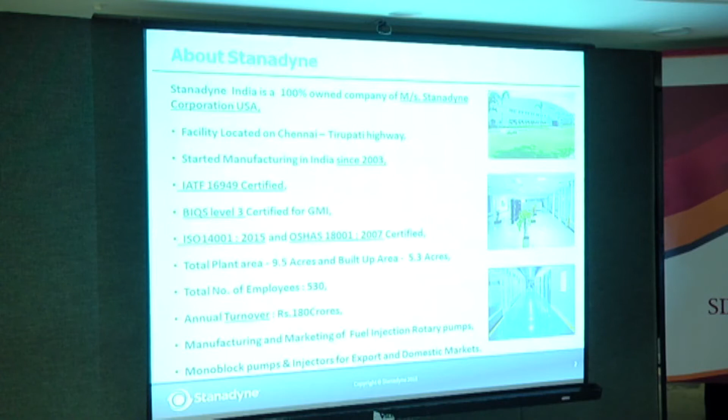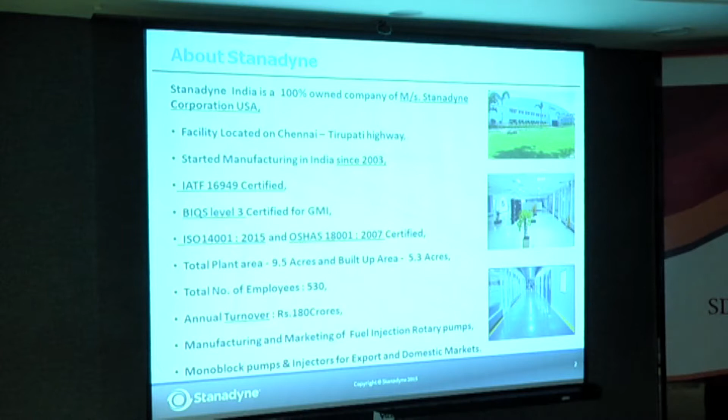Stanadyne has its headquarters in the US. We have 5 plants all over the world: one each in US, India, China, Italy, and Sharjah. Here in India, since 2003 we are certified IATF 16949, ISO 14001, and OHSAS 18001, and also BIQS level 3, certified by General Motors India. Our turnover in India is around 180 crores, and globally we are around 2,500 crores.

We have won certain awards. In 2019, we won Excellence in Quality Development, given by Manufacturing Today, organized by Aditya Birla Group. We also won the CII Excellence in Energy Management Award, which we have been winning since 2015. And this year we also won the Best Supplier Award from General Motors US.

Our products, we are making fuel pumps, which we supply for gensets as well as tractors. We have around 12 customers, and the major ones are John Deere, Kirloskar, and Fiat.

Mr. Balaji will take us through the define and measure phase of the DMAIC approach. In the define phase, our complaint is fuel leakage from the hydraulic head, which is contributing 35.3% of our total rejection in SIPL. Our target is zero rejection from the fuel leakage.

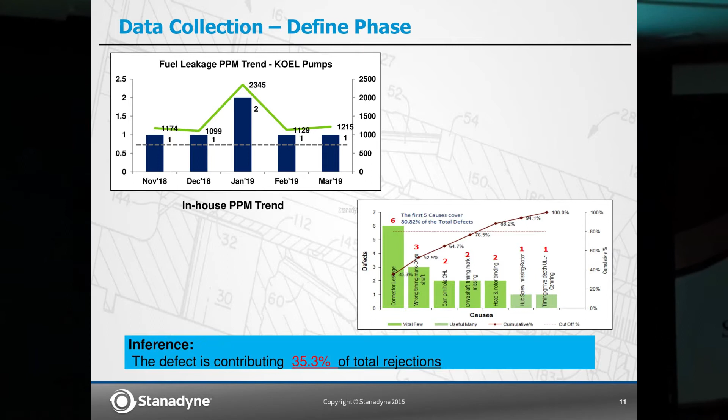This is our cost of poor quality. It will incur around 71,600 rupees overall for the year.

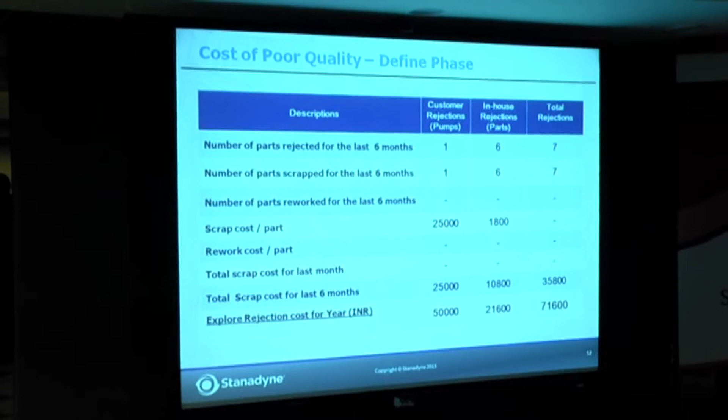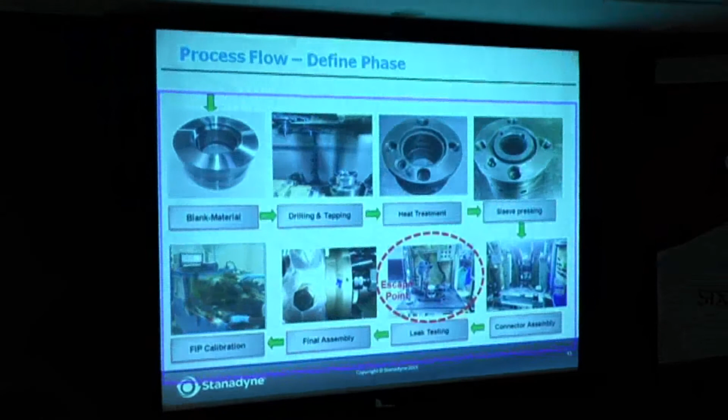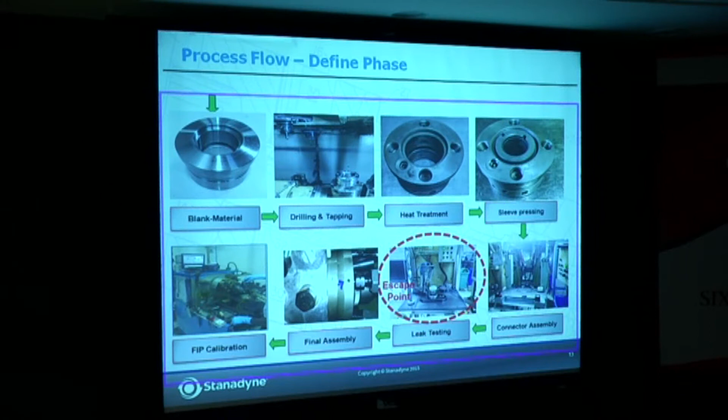This is our process flow. We receive the blank material from the supplier, then do drilling and tapping, heat treatment, sleeve pressing, connector assembly, and leak testing. This is the escape point. Then final assembly, and then we do the calibration. This is our leak test process.

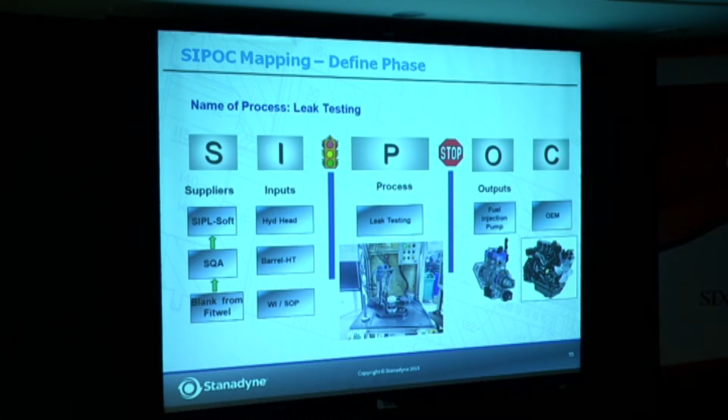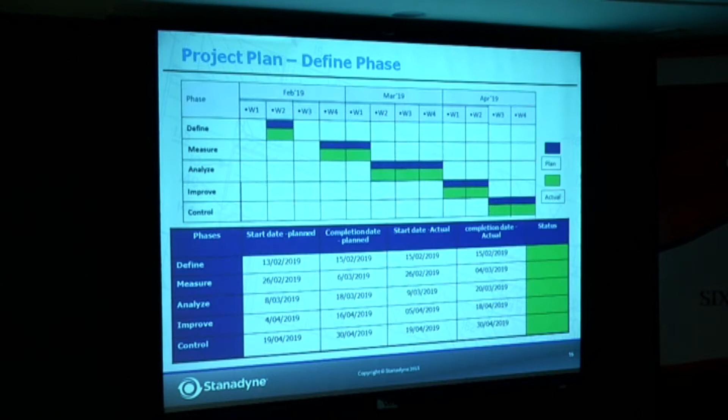This is our SIPOC. Our process is leak testing. Our input is hydraulic head and work instructions. Our supplier is our soft line, our supplier quality, and blank from the supplier. Our output is fuel injection pump, and our customer is OEM. Our project started in February 2019, second week, and completed on April 30th. This is our team members.

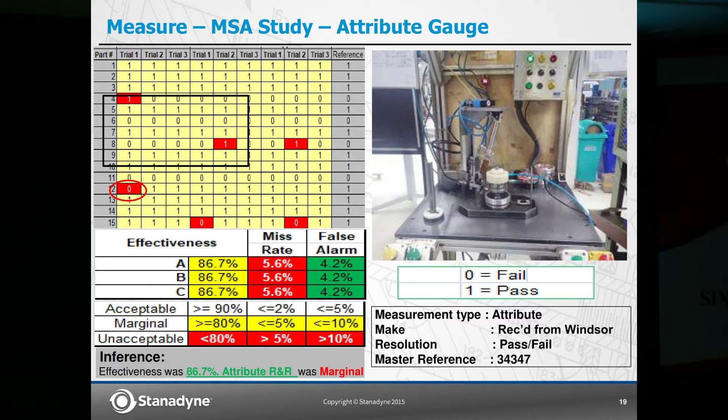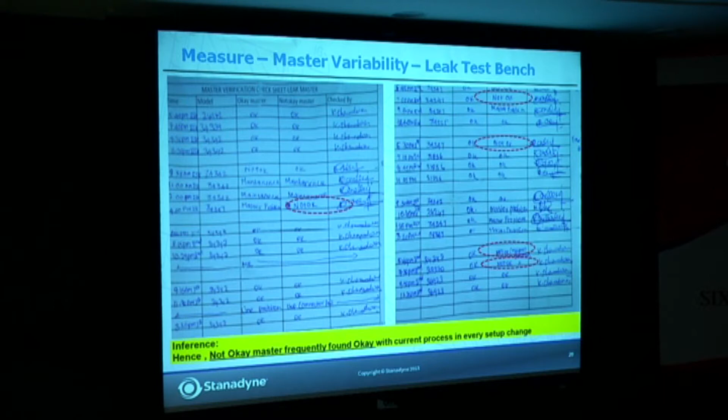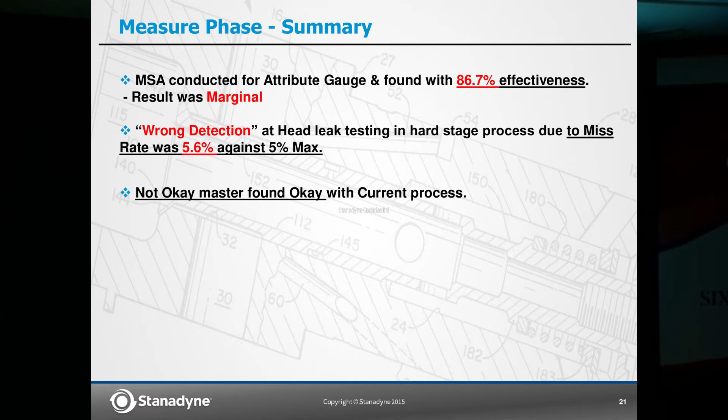Measure phase: first we do the attribute measurement analysis. In that, our effectiveness is 86.7% and our miss rate is 5.6%. Overall it is marginal. Then we do analysis with our master, in which the not-okay master is frequently found okay in the leak test process. To summarize, we conducted the MSA on that particular equipment. Overall effectiveness is 86.7%, miss rate is 5.6%, and our not-okay master is found okay in the current process.

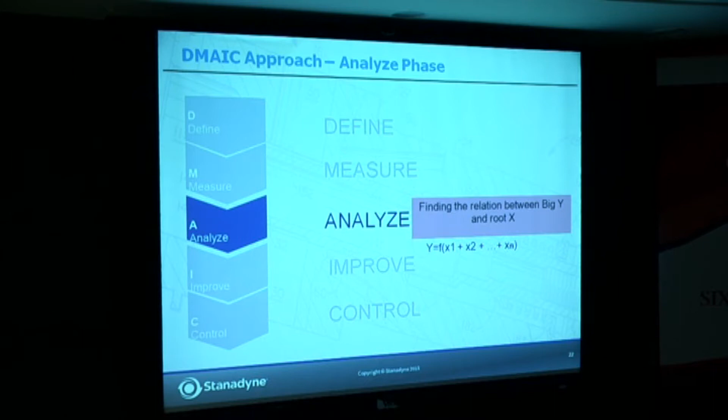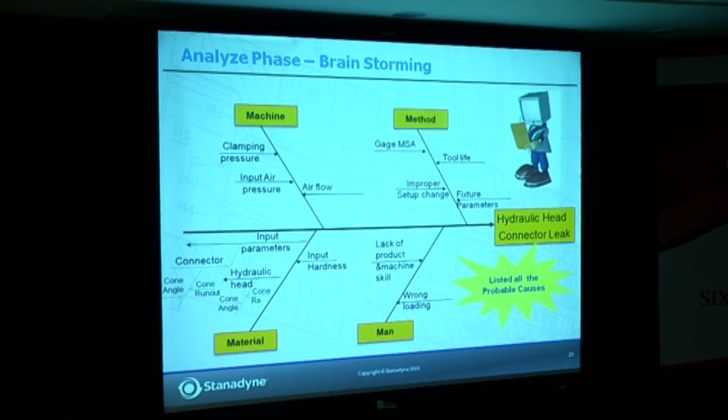Let's hand over to Jagannathan. In the analyze phase, we got together and did brainstorming based on 4M. This shows the Ishikawa diagram where we have taken all the possible causes which would have given rise to this particular defect, this leak issue.

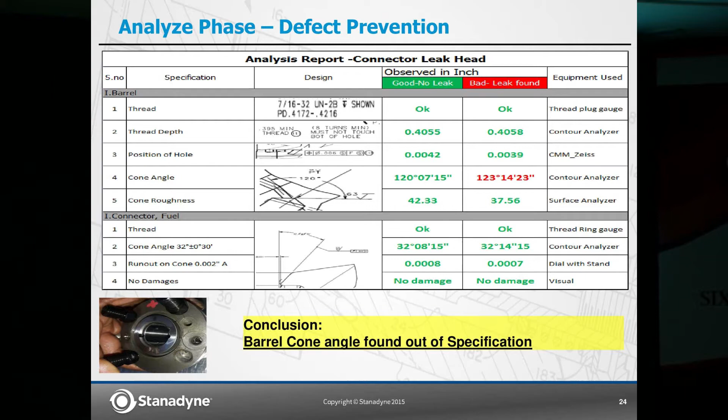Here is a dimensional report for the good part as well as the bad part. In this, we check the barrel dimensions as well as the connector dimensions which are contributing to this leak. We can see the cone angle of the barrel going out of spec. Requirement is around 120 degrees, and it is around 123 degrees.

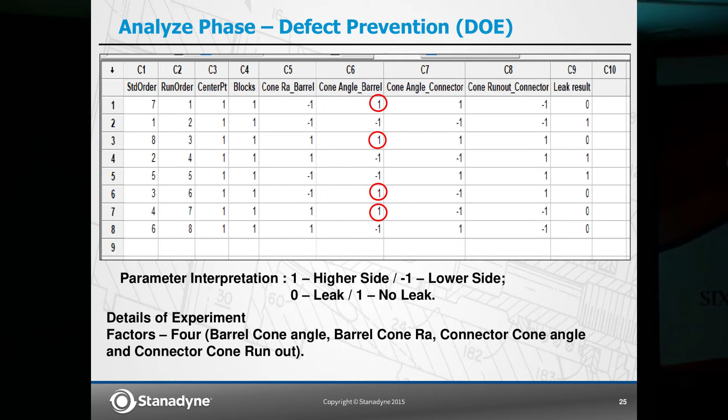Apart from that, we have taken the critical dimensions with respect to the barrel as well as the connector. For the barrel, we have taken the cone roughness and cone angle, and for the connector we have taken the angle as well as the runout. Here, 1 indicates the higher side, -1 is the lower side, 0 denotes a leak, and 1 means no leak.

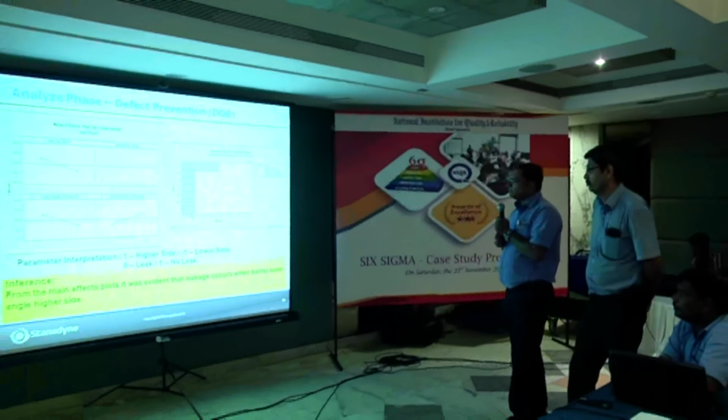So we have made a DOE here. We looked at one factor at a time and checked the leak results. The inference you can see from this plot is that cone angle of barrel shows a lot of difference, which is causing this particular leak issue. When it goes on the higher side, leakage happens.

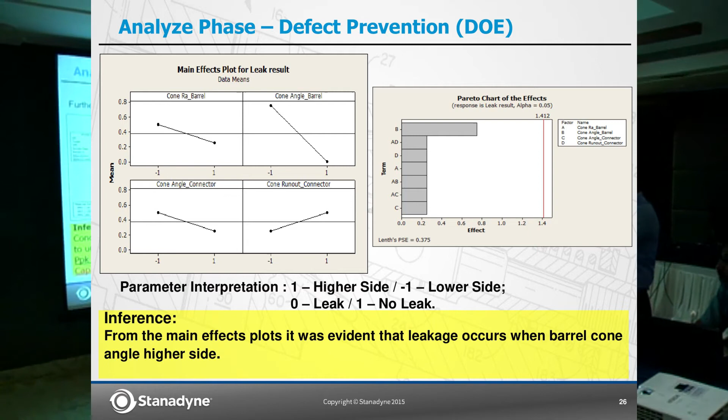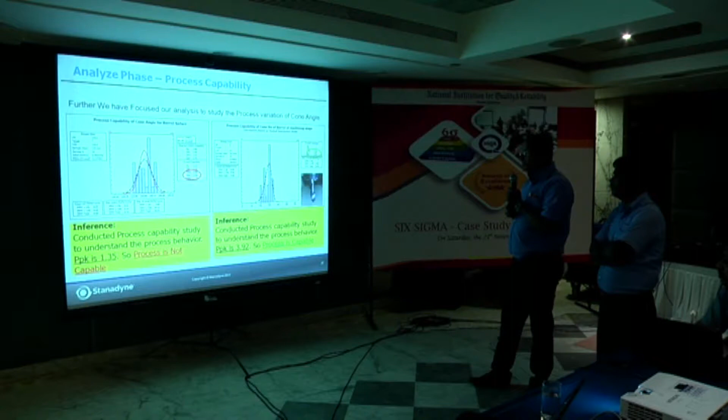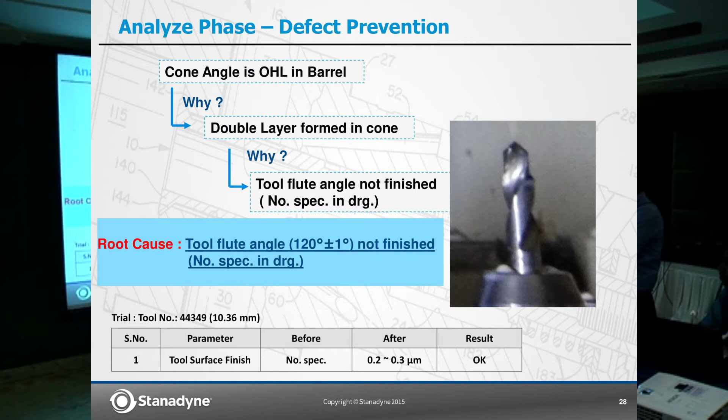In the why-why analysis, we found the tool flute angle finish was not okay, and this spec was not given in the drawing. The tool flute angle is 120 degrees plus or minus 1 degree, which was within spec, but the finish wasn't okay and it is not mentioned in our drawing. We give the drawing to the supplier, but it's not mentioned there.

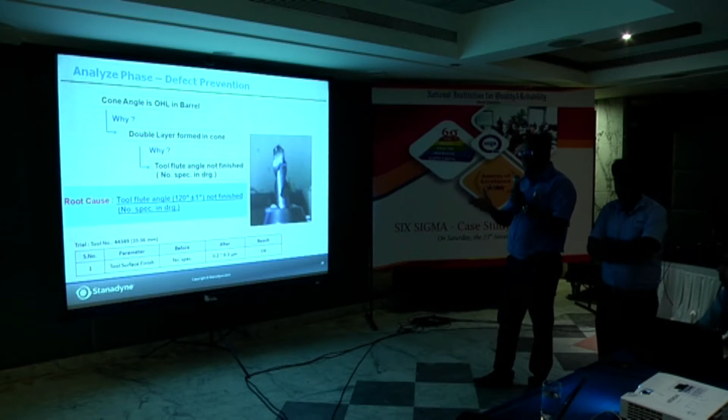So we made a trial. The tool number was 44349. Before, no spec was given in the drawing, and we had taken it as 0.2 to 0.3. We made several trials and got the required finish, and the result was okay. It was within the spec.

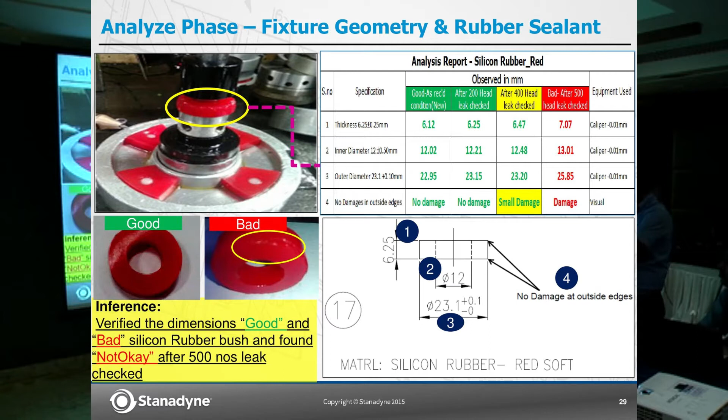For detection control, looking at the rubber sealant in the leak test fixture, we had certain dimensions given in the drawing. We took the dimensions for each condition - in new condition, 200, 400, and 500. At 500, we saw a variation in the dimensions. So approximately at 500 numbers, the rubber sealant dimensions are varying and going beyond spec.

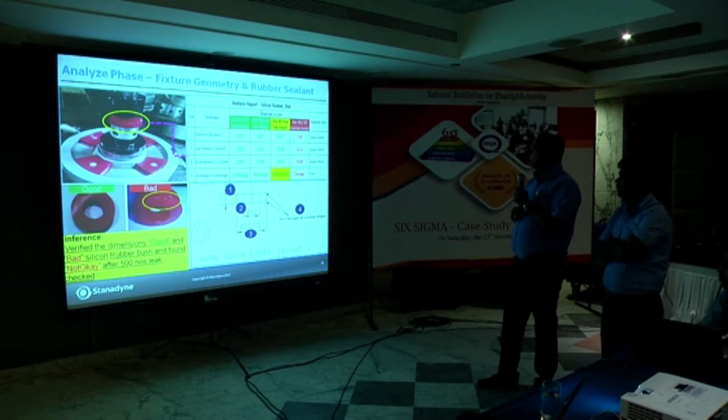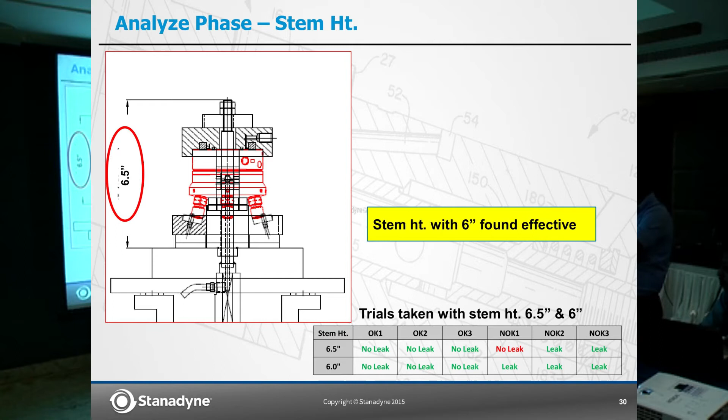Apart from that, in the same leak test fixture, the stem height is 6.5 inches. We made a trial by reducing it to 6 inches. We took 3 OK parts and 3 NOK parts. For 6.5 inches, a leak part was showing as not okay, no leak. Whereas for 6 inches, it was perfect - all OK parts were no leak and NOK parts were showing as leak.

So in this why-why analysis, we can see 2 root causes for detection control. One is silicon rubber bush worn out, and the fixture stem height is on the higher side.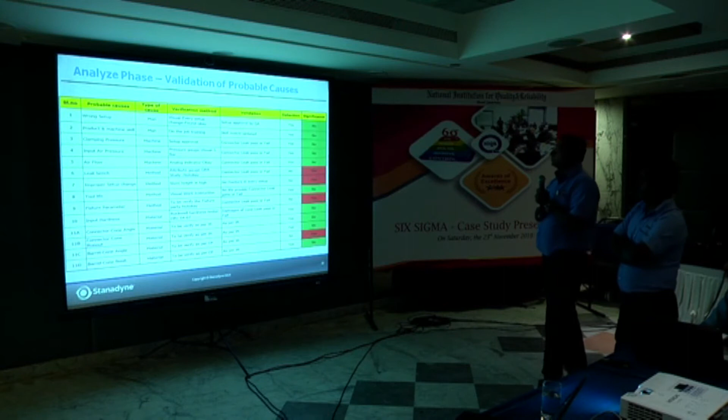This is the validation of all the probable causes which I identified in the Ishikawa diagram. Most of the other causes are non-significant. The significant causes have been identified here.

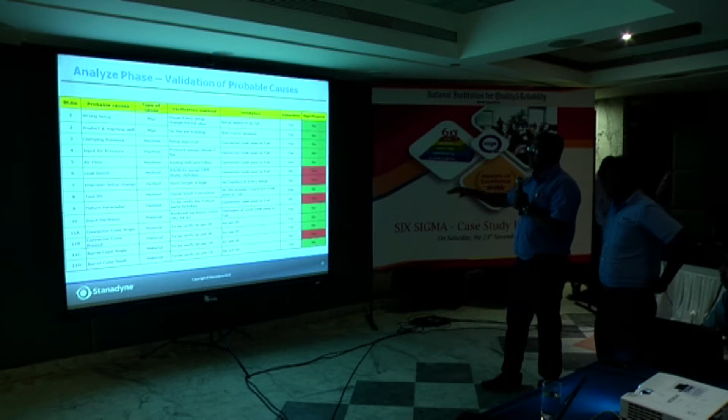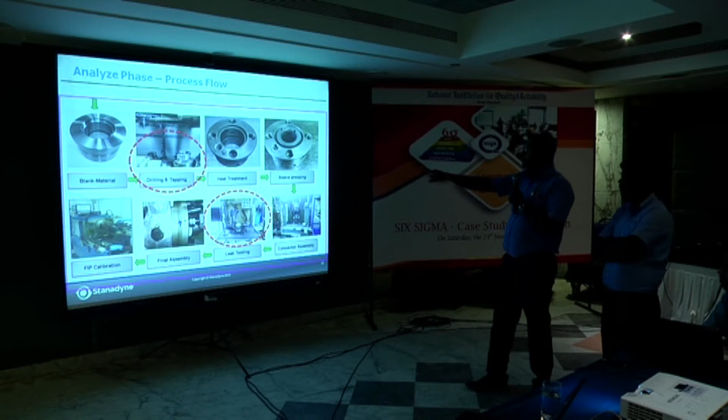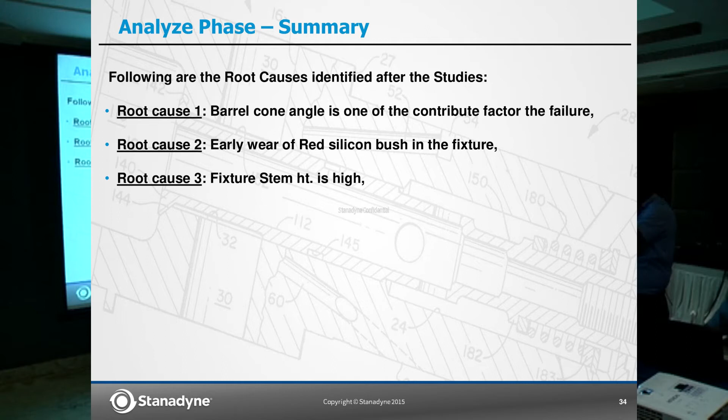So in the summary of the analysis phase, root cause 1, the barrel cone angle, is one of the major contributors for occurrence, and 2 root causes have been identified for defect control - that is, the red silicon bush wear, and the fixture stem height being on the higher side.

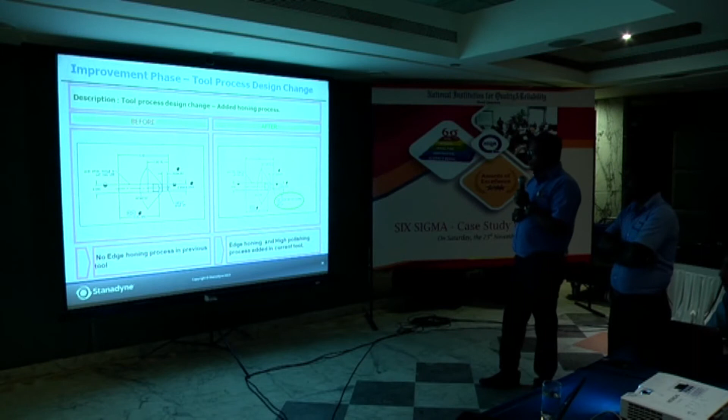Now we come to the improvement phase, the actions which we have taken. In the tool process design, we added one more process. No edge honing process was there in the previous condition, whereas now we have provided edge honing and high polishing to achieve that particular finish of 0.12 to 0.13 microns.

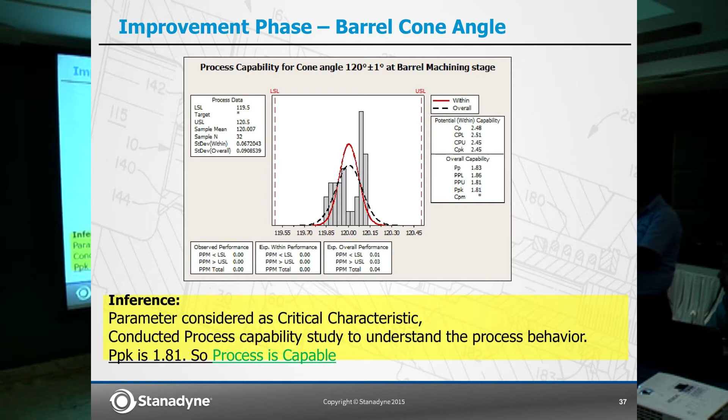After doing this activity, we took the process capability again, and the PPK was 1.81, and it became capable.

This is the action we took in the leak test fixture, where the stem height has been reduced from 165.1 to 152.4, which means 6.5 inches to 6 inches. Apart from that, we set the rubber life as 400 numbers, because the failure was at 500 numbers, so we made it 400.

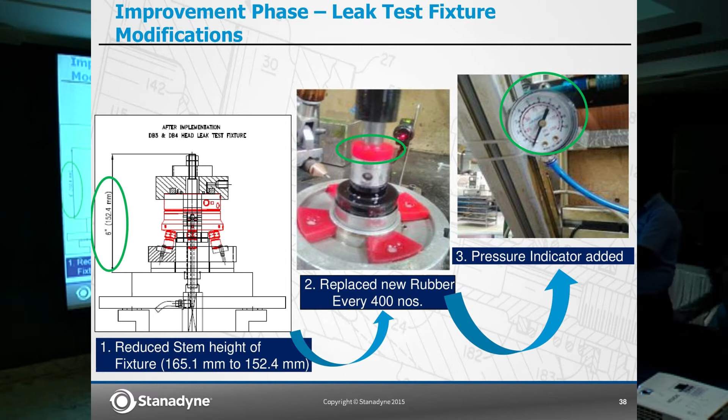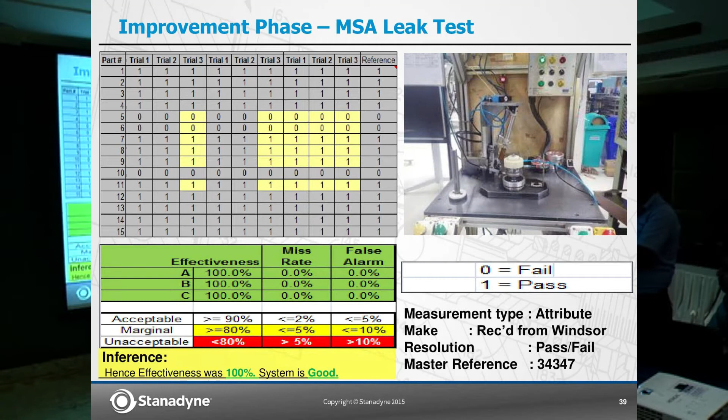We also added a pressure indicator to check the inlet pressure condition, which wasn't there earlier. And we did MSA again with attribute gauge, where the effectiveness is 100%, and miss rate and false alarm are 0.

So the implemented actions were modified stem height fixture, sealing rubber where the life has been fixed, and a pressure indicator is also provided for the leak test machine.

And we took 3 heads actually, we made a pump. We have 2 leak testing tables here. One is for the barrel assembly as well as for the pump testing.

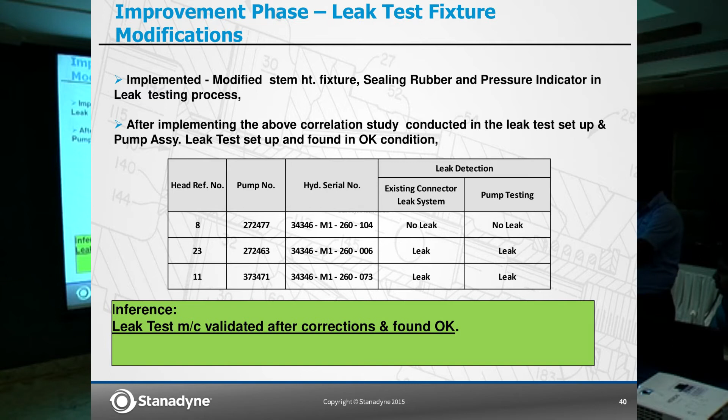In both the conditions, we have checked the correlation. After implementing all the actions, it is actually correlating with each other.

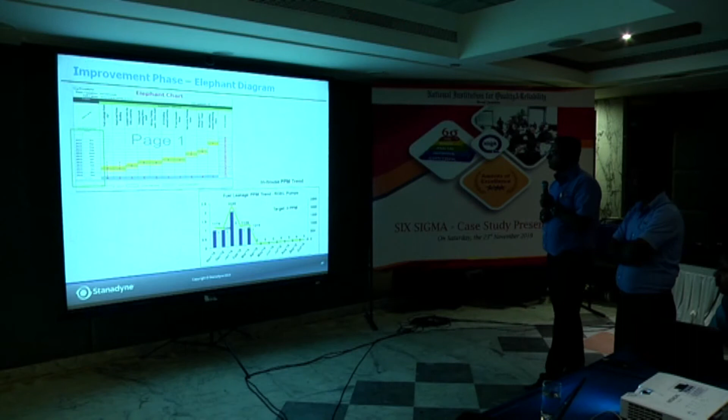So this shows the elephant chart, where we can see 0 rejections from April onwards. We had totally 6 rejections from November 18 to March 19. Beyond that, it is 0.

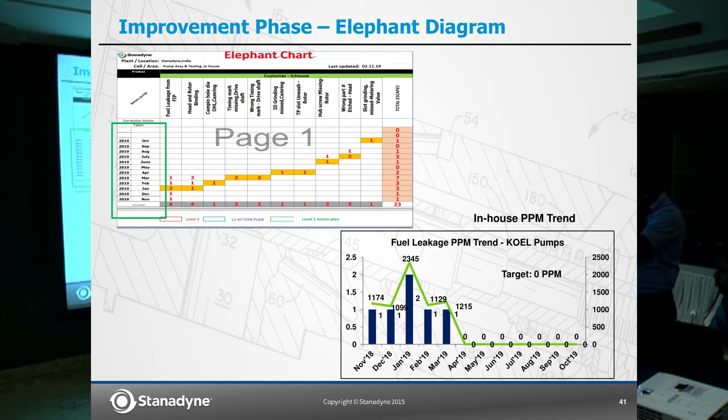And the PPM has dropped. This pump we are giving for Kirloskar engines. So from April onwards, we can see 0 PPM.

And Mr. Sivaraj will explain us the controls which we have taken finally.

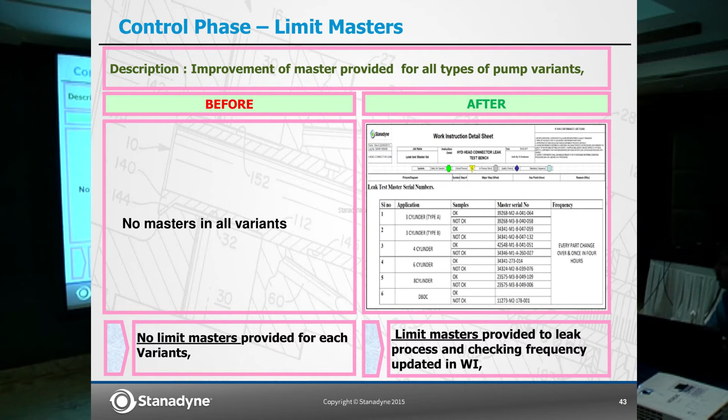Good evening, sir. After implementation, we have updated some documents. First of all, we updated the work instructions. Before, you were using only one master; after, we introduced different model masters. The limit master is given and updated in the work instruction.

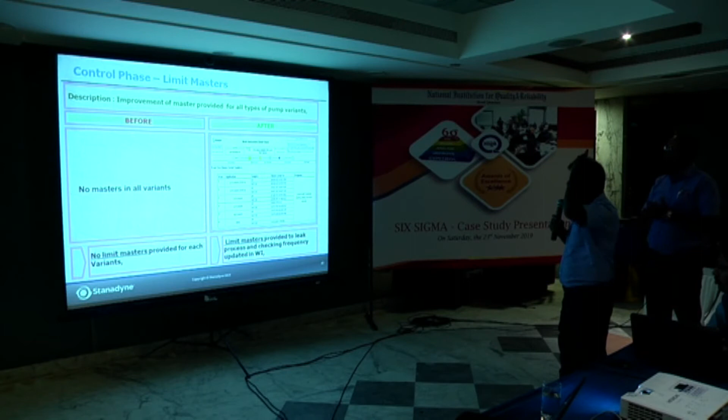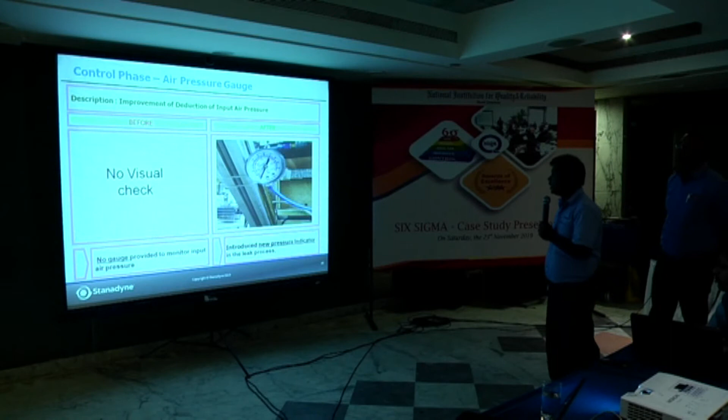Then, the life was before not shown in the work instruction; after, we gave 400 numbers and updated it in the work instruction. Another one, before not showing the air control, after showing the air control, introducing the pressure control gauge.

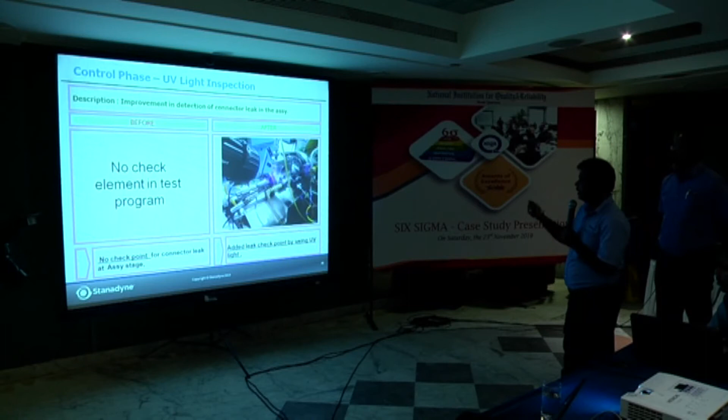So it is one of the detections. If not okay, it automatically removes our connector from the head.

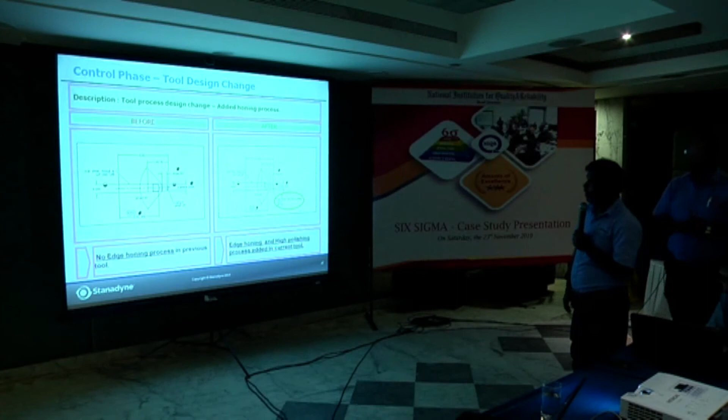Okay, can you show me the video? See the video. If not okay, it automatically removes the connectors from the head.

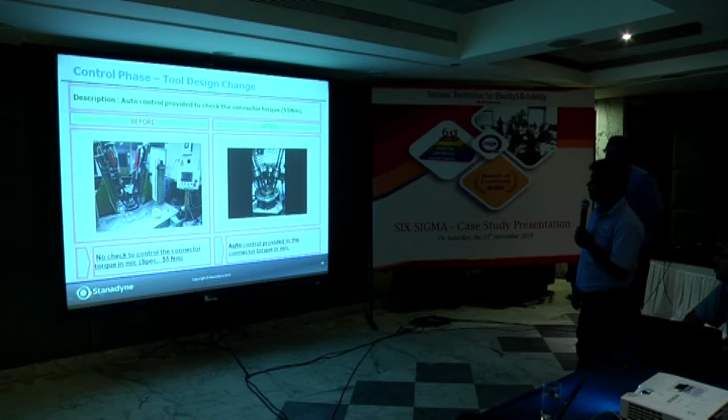It is showing out of spec. It is one of the error proofing methods during the assemblies.

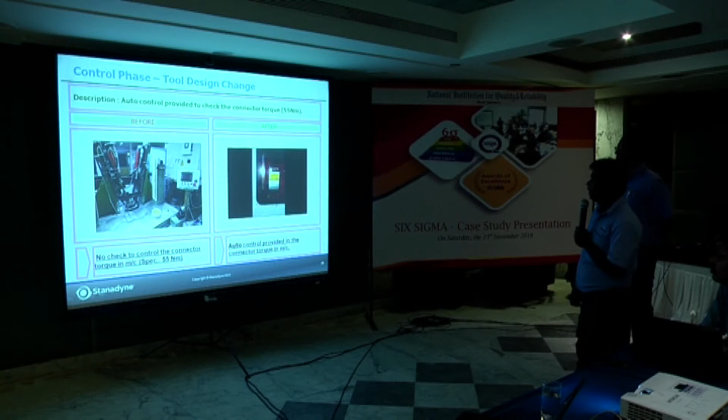Next is updating the PFMEA. Before, the RPN was 84; after, the RPN is 56.

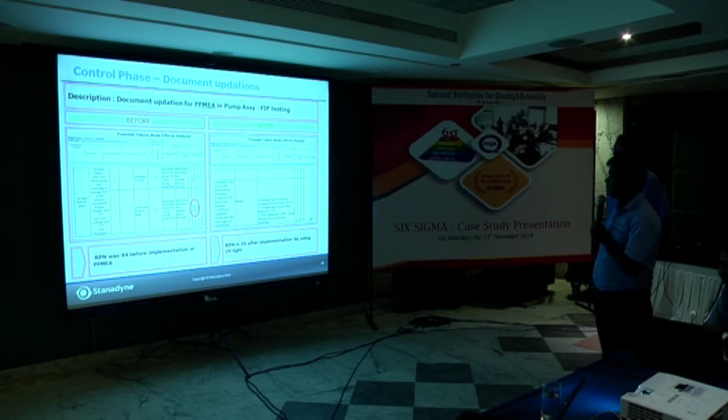After that, updating the control plan. Before, it was using bar visual inspection for the angle. After, it is using the measurement system, changed from that method.

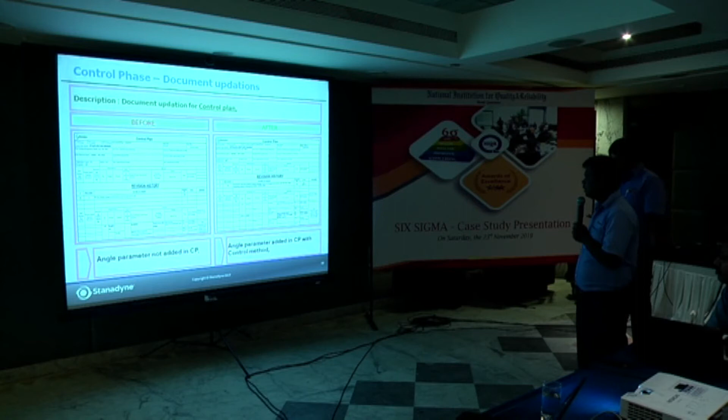Then leak test fixture stem reduced from 6.5 to 6. Then sealant rubber life fixed at 400 numbers. Then new indicator pressure gauge introduced within our leak test.

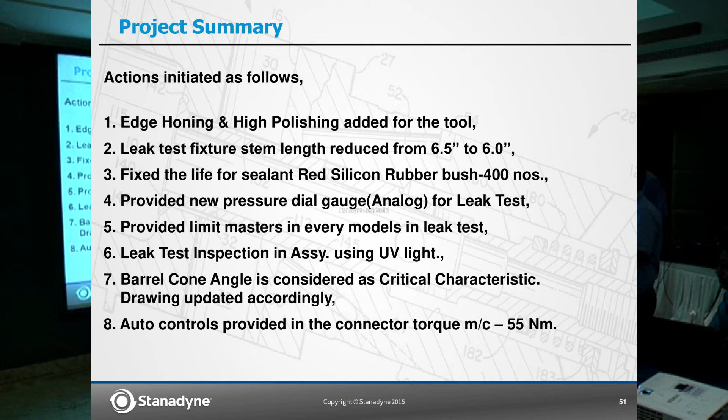Then limit master provided in our different models. And the leak test inspection assembly using the UV light. The barrel cone angle is considered the critical characteristic of the drawing.

We updated accordingly. So auto control provided in our connector torque machines after 55 Newton meters. So those are using the 7QC tools. The elements are different.

Studies conducted in our project. So thank you, sir.

In your cost of poor quality, why is the calculation like that? You said some 71,000 rupees. Is that the total cost or what? Am I understanding right? 71,500 is actually per annum.

So we got in one particular month 6 numbers and 1 number rejection at customer end. So if you see for the next 6 months, it was one particular value. When you double that, it goes for 12 months. That's why they have mentioned that.

Oh, it is measured like that, okay. Is there any estimate? That is what I want to know. Have you made any assumption in computing that value?

We have a calculation where they take all the product cost, the process involved, and the inspection cost. We have a separate one. So what is the new cost of quality?

Zero? New is zero cost. Zero? With respect to this particular difference. Oh no, that is what.